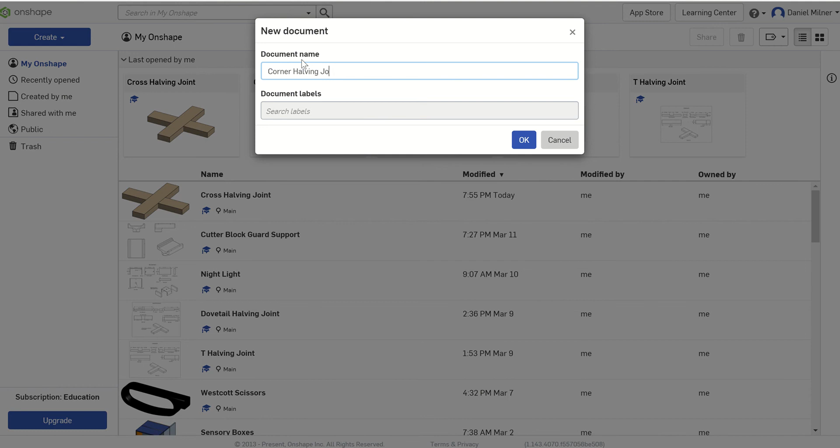Okay, so in this lesson what we're going to do is look at creating a corner halving joint. In creating this, all we need to do is create one piece and use that twice.

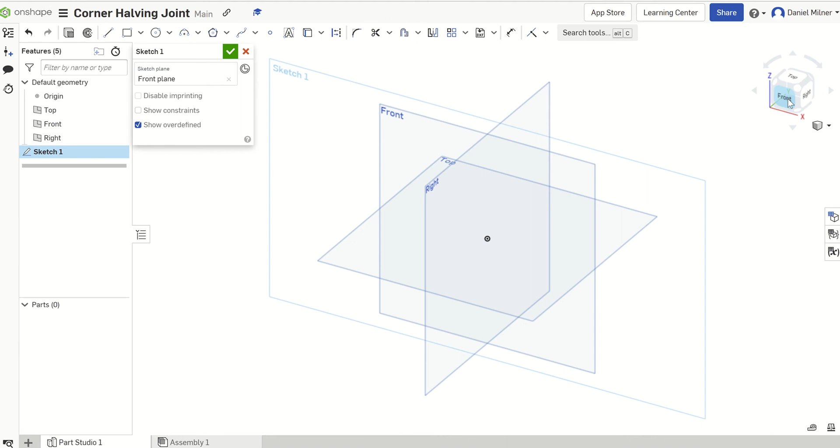Off we go. Click on sketch, then front plane, and we'll click on the front on our dice. Corner rectangle, start from the origin, any size of rectangle. Smart dimension, we'll go 150.

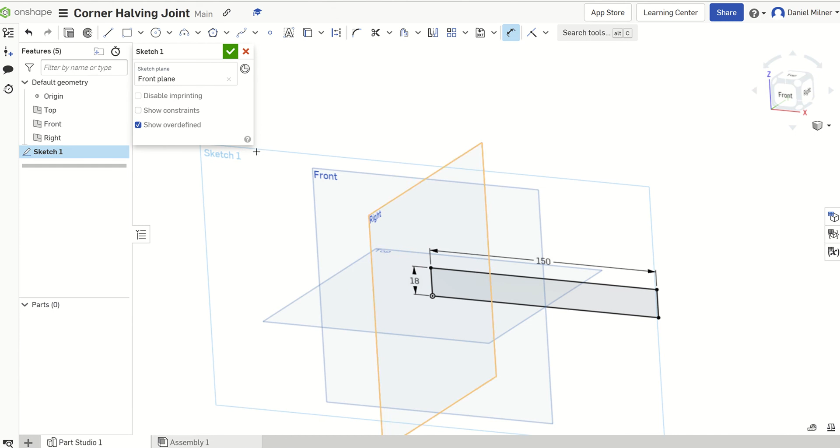Press F, by 18. Extrude, add 40 mil, and reverse. Right click, edit appearance. Okay, so that's what we've got.

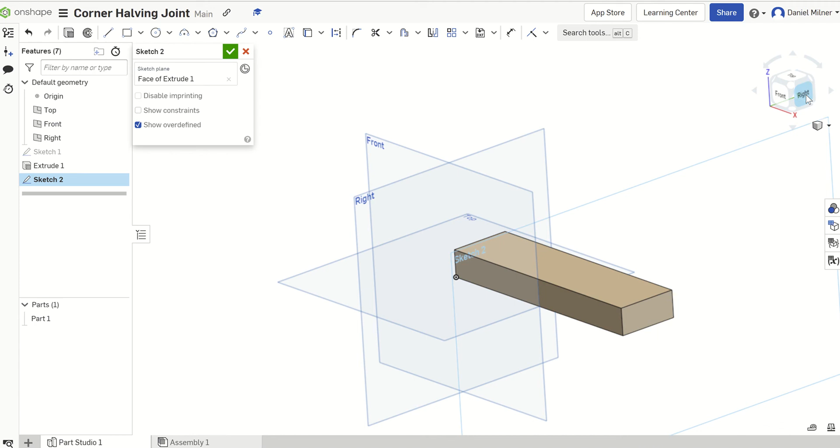Next, what we're going to do is sketch on a face instead of a plane. We're going to sketch on a face which is here, and that face should be on the right side. We can click on right here and that will look perpendicularly at that face, or we can just right click, view normal to sketch plane, and that will also suffice.

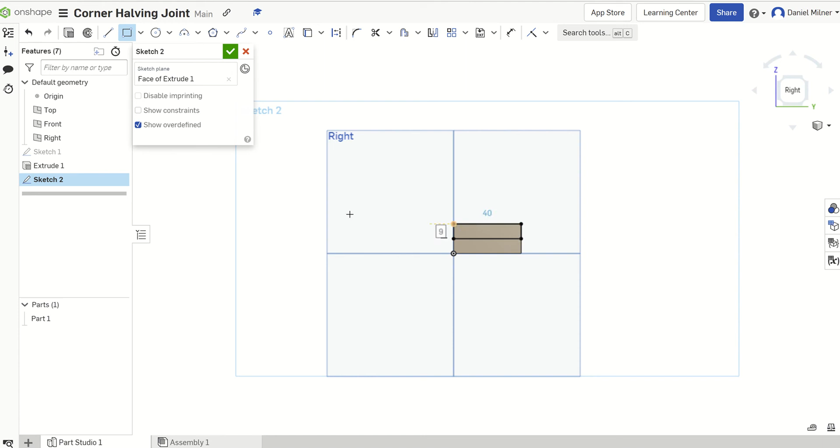So try and snap on your top left and then roughly come down to your box, which signifies halfway. That's completely 9 millimeters by 40, which is exactly what I want. So we're just going to revolve that, and we're going to go to extrude and remove this time, and that will be removed at 40 millimeters in depth. And correct, that's our part finished.

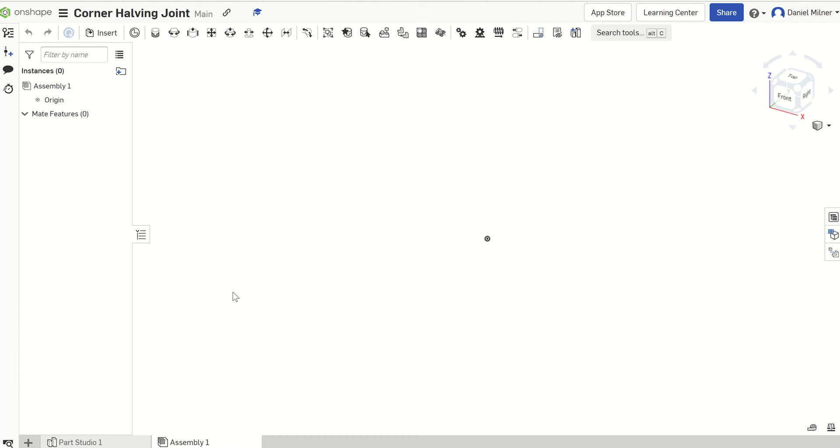So what we're now going to do is go to assembly, and we're going to go to insert, click on my part, zoom out, click on my part again and bring it in, and click correct. So again, like the cross halving joint that I have completed also before, when we bring one in, we're simply just going to left click on it.

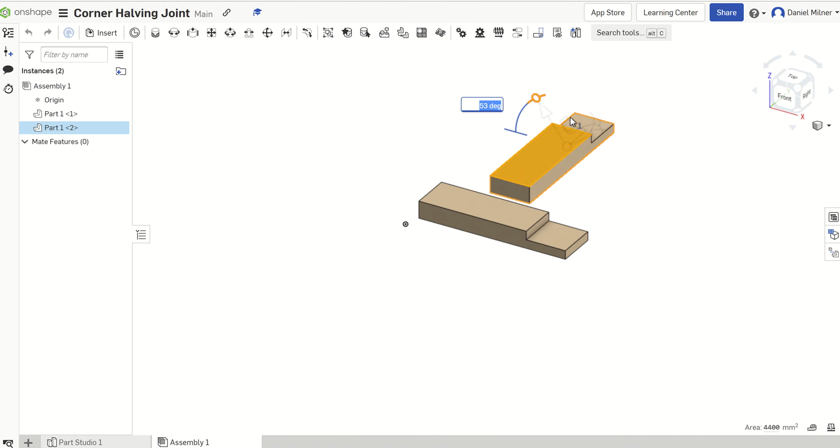We've got our three tridents here, so we're just going to rotate our second piece in the way that we want it to fit down on top of this. So we would simply rotate that over there and it would be at 90 degrees, so just type in 90 and enter. And what we would like to do then is catch that around and flip it at 180, so just go 180.

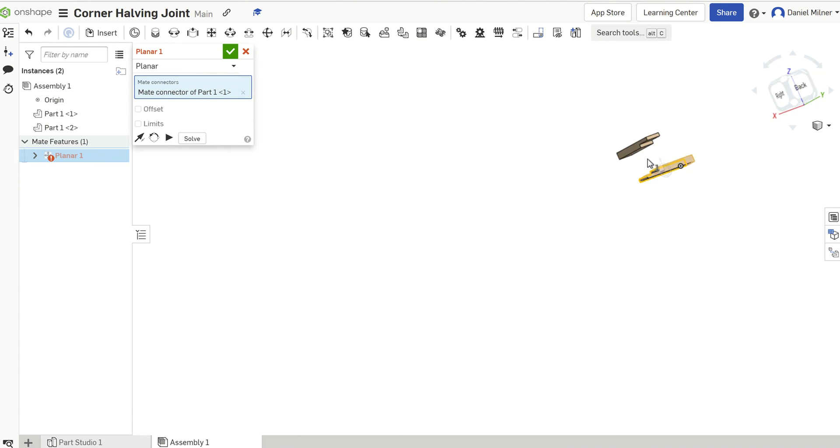Okay, and that's that. So the next thing we'll do is go to a planar mate, so we just want to mate these two together. I'm simply now just going to look and see at what I have first. So I'd like to go with the bullseye here and the bullseye here. Press correct, so that's those two faces in line.

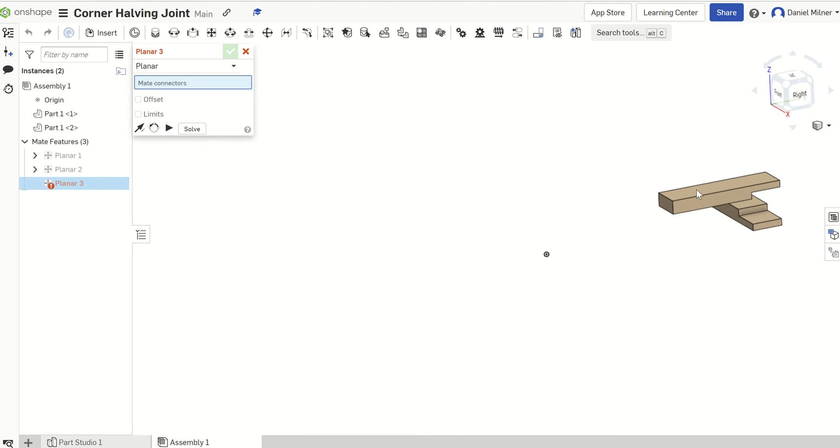My next mate that I'm going to look at is here, so it's going to be the middle of this face, which is here, and it'll be the middle of this face, which is here. Press correct, so I can move that up there now. And lastly, I have this bullseye and up here, and that's my corner halving joint, or a corner lap joint.

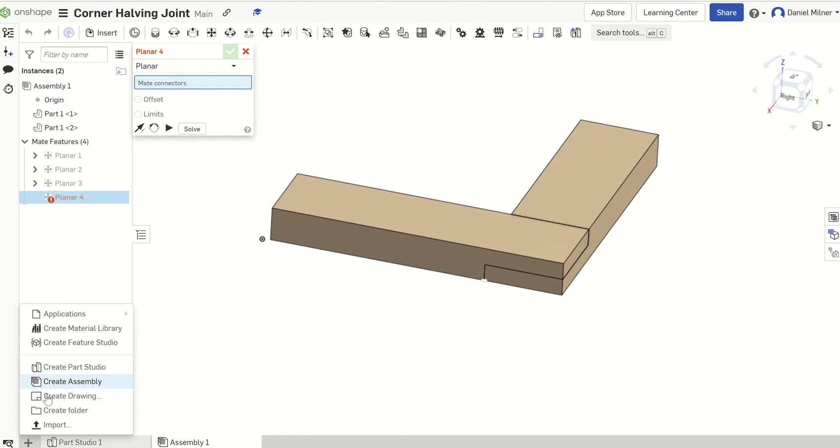Okay, just press F, bring it in. Lastly, we're going to look at creating a drawing. Create drawing, custom template, size A, do not include border, do not include title box. Press OK.

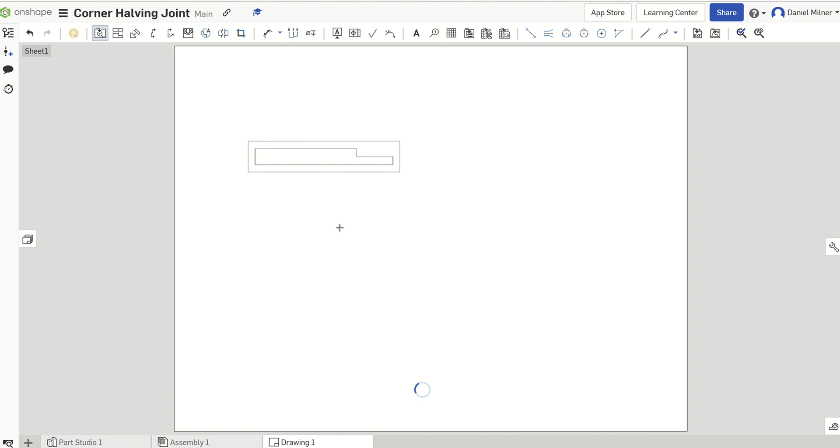And we're just going to go to insert, pop that in, and we're going to go down. Just wait while our computer is loading. Or we could go up, probably better detail in that one.

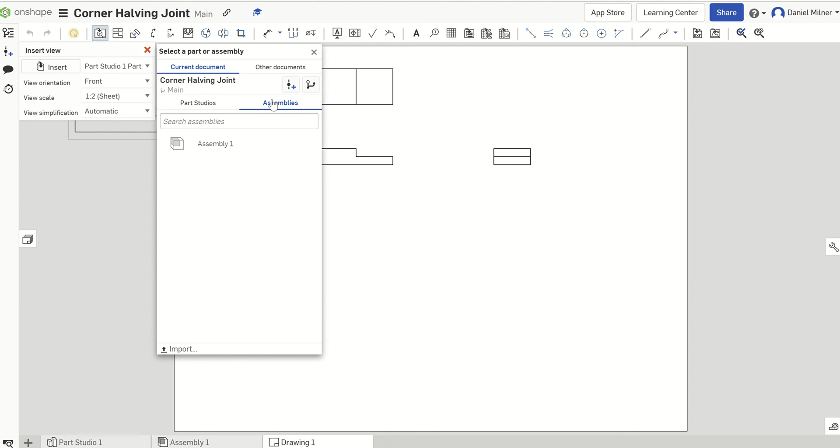And I'm going to click on this and then move to the right and get my end view, which is there. And I'm going to go to insert an assembly. I already have an assembly created and my Onshape should be picking that up. And I don't want a two-dimensional view, I would like an isometric view.

There we go. Okay, what I might do is bring in my part that I just made and we will go for an isometric view of that. Okay, like that.

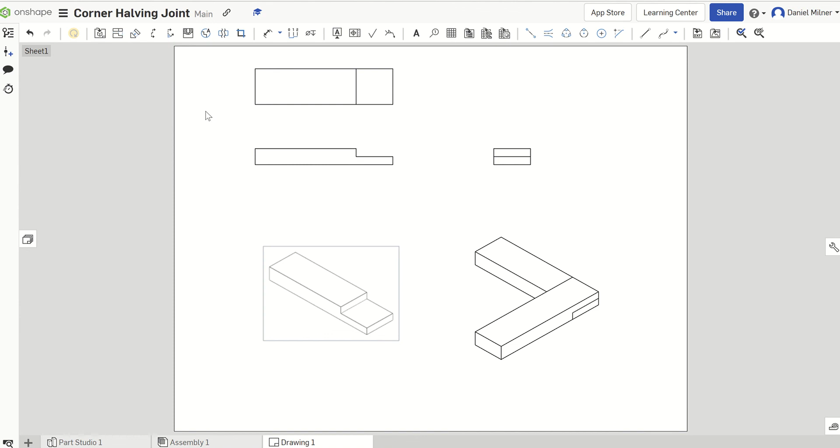So we're nearly ready to start our dimensioning. First, I'm just going to rearrange them a bit tidier on my sheet, making sure that we have adequate room between our three orthographic views, just to insert any dimensions or notes. So we're going to go to our heading, and our heading here is a corner halving joint. Okay, and we'll pull that out, we'll highlight it, and we'll underline.

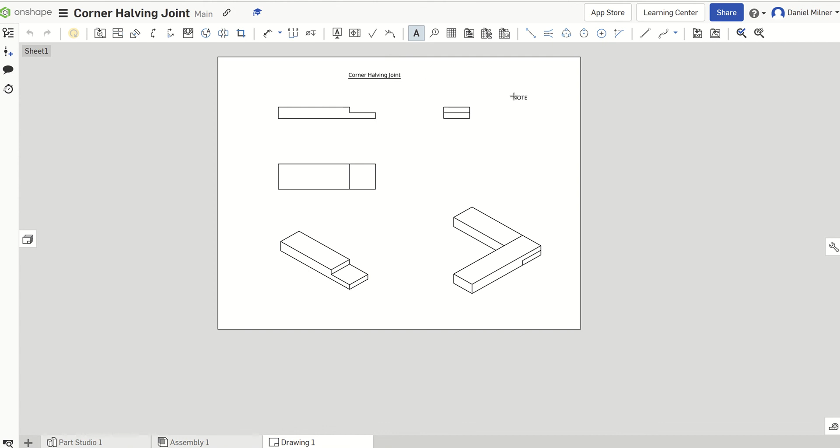Press correct. Okay, so we're going to go here now with front elevation, plan view, and end elevation.

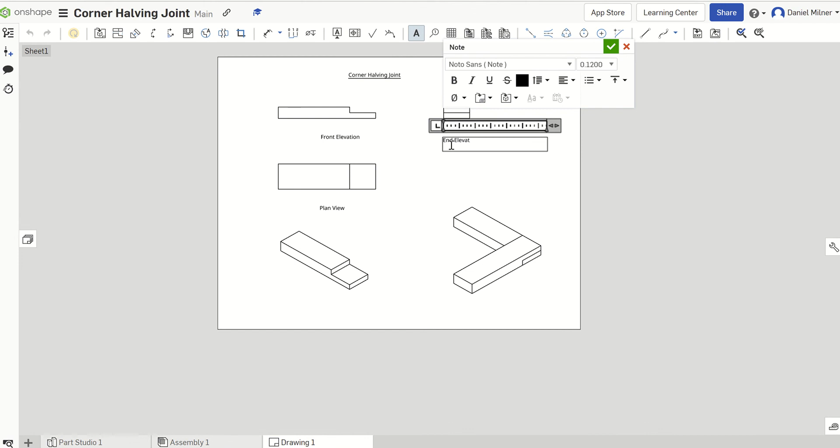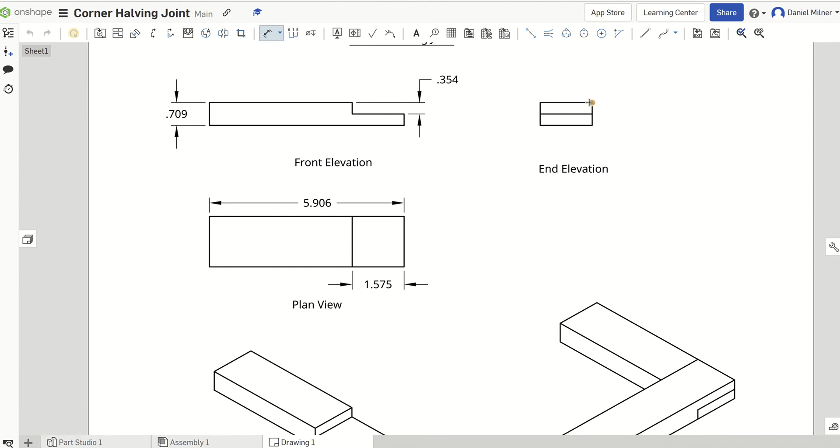Smart dimension, so from here to here. I always like to put one dimension in each view. As you can see, I'm repeating myself there, but I'm just simply going to press escape and click on that, left click and delete. So just always try and put a dimension in each view, because each view then will just be on its own, really.

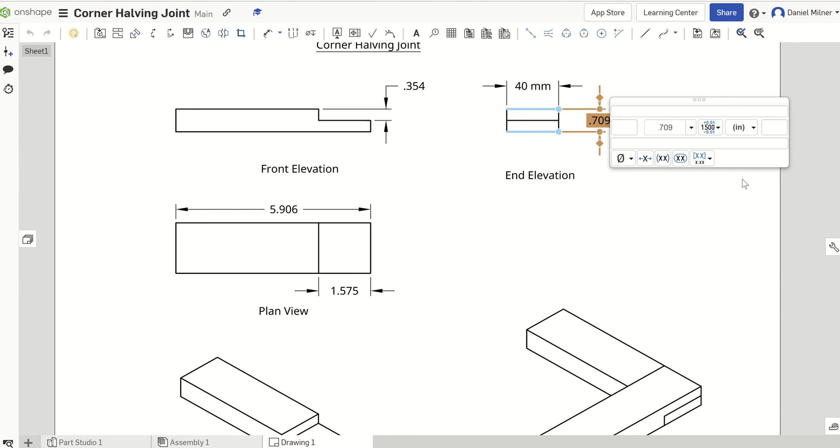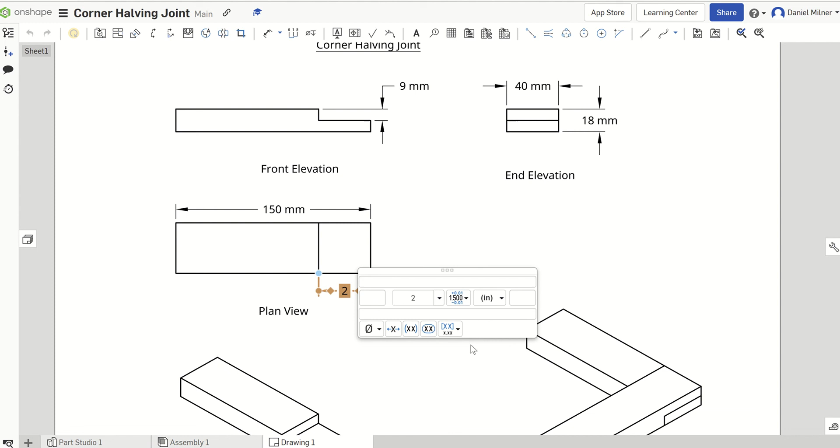Now we'll go to metric and no decimal places. Just have to click out of here before selecting that. Click out, click back in, click out. Right, okay, so I'd like to maybe bring the 40 to the right, or I could bring it to the middle there. Probably looks a bit better if we have it in the middle. The 9, I'd like to take it in the way. The 18, we'll take it up and over that way like that. It's a bit neater, have our writing at the same height.

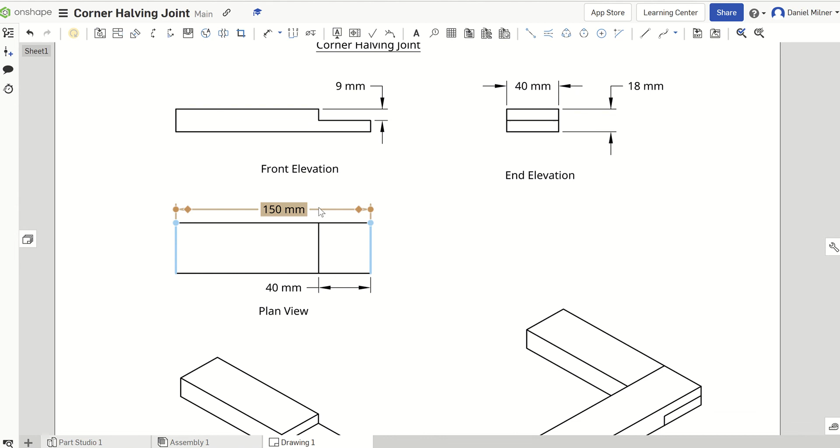So that should be everything there now before we go. There's not much in that, but it gives you an indication of your three orthographic projection views, an isometric of the piece you're actually creating, and of an assembled view. So we might put in a note at the bottom, just going to say isometric view of part. That's correct, and we will now write here.